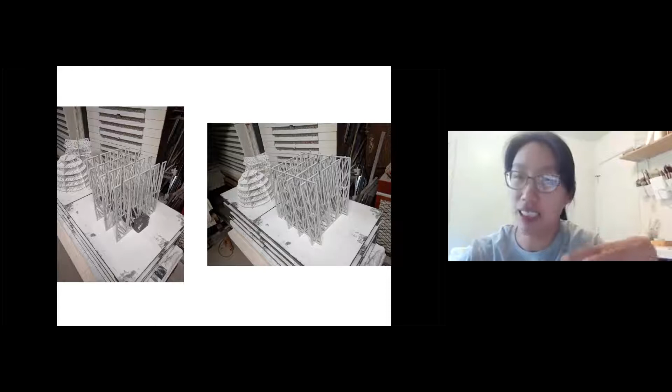So you can see that there's 2 other pieces that are also on that top bed. Also, they're just slotted together very gently. And then, when it's in the kiln and it gets fired, all the glaze is basically sticking everything together. So here is some of the final products of that firing. You can see there are these round rondelle forms, and then there are these more rectangular forms that are slotted in there that basically keep it together.

So it's pretty time intensive to make these forms. It can be somewhere from more than a month or a couple of months, depending on how many models or patterns I need to make. So for instance, this one is 2 patterns, right? There's a circle, and then there's a rectangular one. So that's actually not that many shapes.

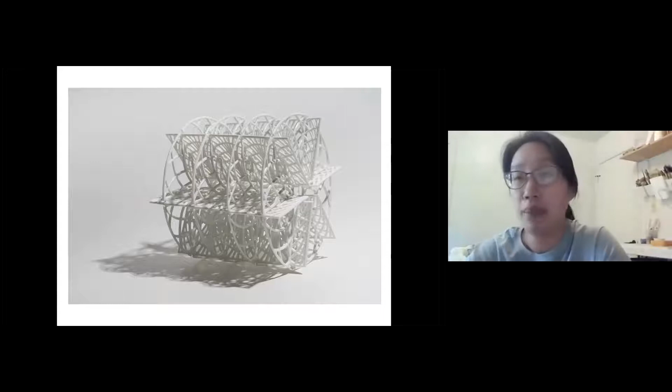If I have to make a form that has maybe 6 to 7, maybe even more than that, every single different shape needs to have a different mold. I can't just make one big mold and then cut it into different shapes. That doesn't work. So it's very particular in how aesthetically it looks. I have to design the pattern to fit that rectangular or that oval shape. So obviously that plays a big part as well.

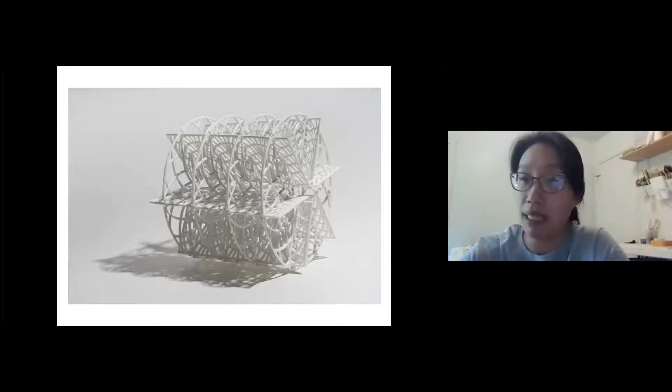So same thing with this bowl-like sculpture here, right? Each of those circles, they're all different molds. The side piece is one kind of shape as well. So, I was really interested in how light would be able to pass through these forms. And the idea of defying ceramics and defying gravity in some sort of way creates this element of wonder.

So this type of form is actually called slice forms, and if people are interested, they could look it up on the internet. Slice forms is a method where you can draw something 3-dimensional in CAD and put it into this program, and then it will slice it up, and you can create a slotted form from that. I believe it's most often used in furniture design, maybe architecture as well. But anyways, I was also interested because it's this 2D to 3D kind of method as well.

So this is just a breakdown of how I create things. You can see design: RhinoCAD, obviously I use that one the most, Illustrator, Fusion 360, and there might be 1 or 2 other programs, but RhinoCAD is definitely the most used program. Then prototype and testing, so cardboard or 3D printed models as well.

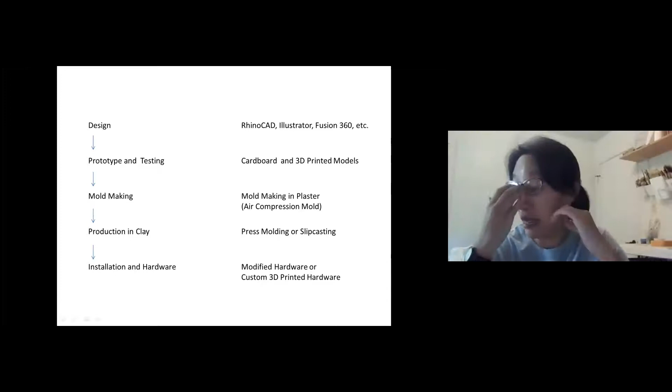For a current project that I'm doing, I physically make the plaster mold, and I go through the whole process, and that's not the final mold. And then I make a mold again. So usually in the prototype and testing method, because I'm working with molds, I can produce that module itself a couple times or more, and glaze fire everything really roughly to figure out what works.

And then after that, basically I'm going into production of many objects. So mold making, obviously mold making in plaster, I do an air compression mold. Production in clay, press molding or slip casting. So actually I have not been doing slip casting for quite a long time. The lattice forms that I'm making are actually all press molded and hand built.

More recently, I am combining slip casting with press molded lattices. But I'll talk about that maybe a little bit later on as well. Installation and hardware, modified hardware or custom 3D printed hardware. So the 3D printed hardware, maybe in the last 2 years-ish, I've been doing a lot more on that.

So it's always been very difficult for me to find specific hardware for my work, just because, you know, in terms of attaching it or hanging it and stuff like that. So before, I've bought hardware, I've modified it and it's like, okay. But the 3D printing has really allowed me to really customize the way that I can put things together. And that's pretty huge because I'm not limited to whatever is mass produced.

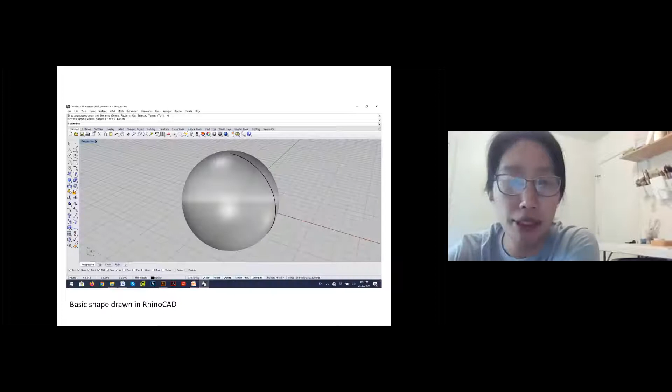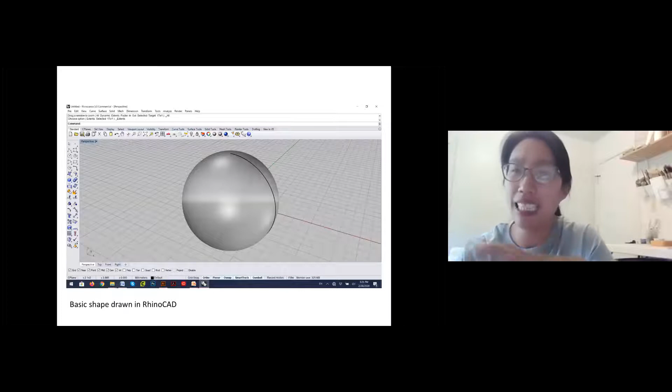Okay, so designing the template and the pattern, I'm going to use one of my slot sculptures just to give you an example. So this is just a basic shape drawn in RhinoCAD. So just a basic sort of circle. So generally, if you look at my forms, the whole big form is quite a simple shape. So it's usually like a box or a cube, a sphere, or kind of like a column, right? But then what it's actually made of, the actual form inside itself, is very complex.

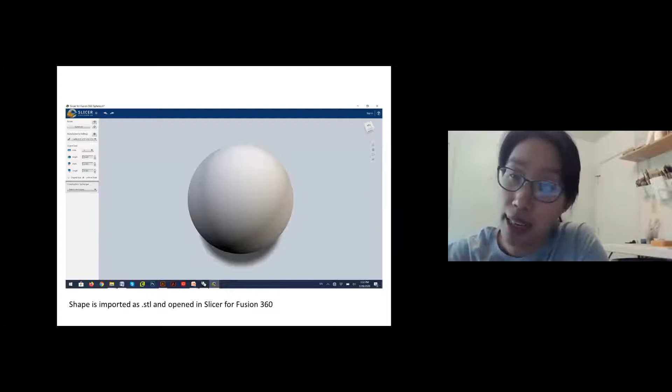So this is actually a slicer for Fusion 360. If anyone is interested in this program, I believe this might be actually part of the actual Fusion 360 software now. I think it might have just all been combined. But if you Google this, I think something will come up that you can somehow find the software. So anyways, it's really great because you can import your shape as an STL. And then you can slice it in many different ways.

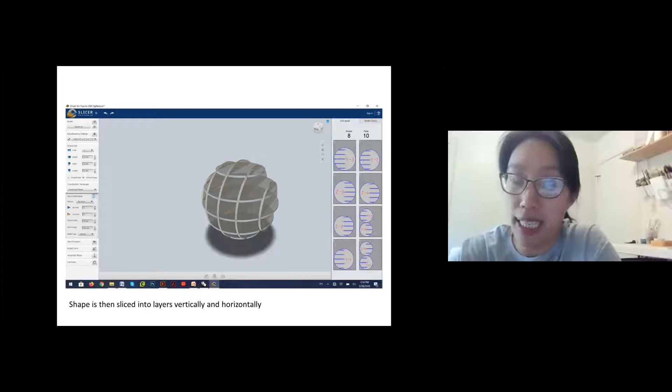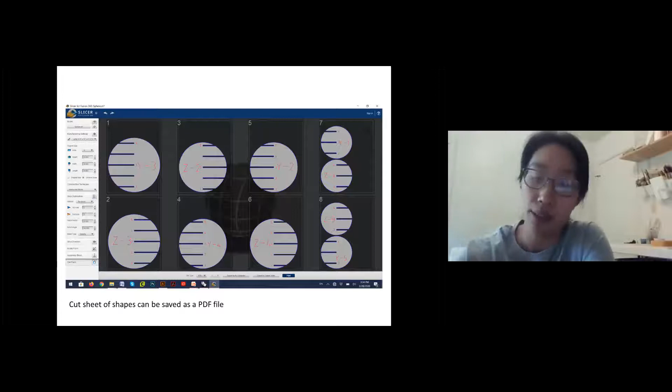So you can see here in the slicer program, how many slices you want in the X and then the Y axis as well. And then it will give you a pattern you can see on the right as a PDF. So I'm going to save this as a PDF. You can see here, it's all marked as well. And you can also set the thickness of your material and also the width of the slot as well. So I take these drawings and here you can see that it's imported into Illustrator and saved as an AI file.

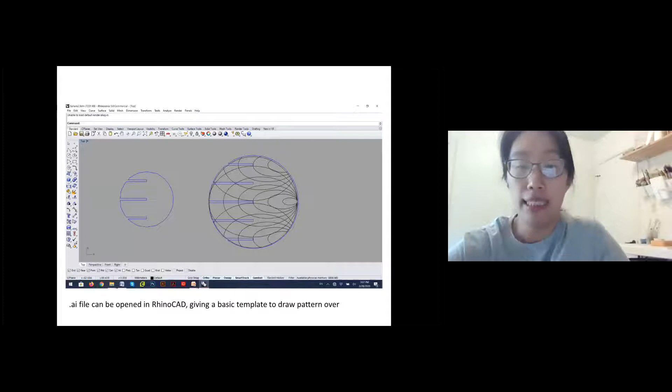So I take this AI file and then I open it up in Rhino. So you can see that the AI file is now opened in RhinoCAD. And then once I have this basic template, I can draw a pattern over it. So you can see this is actually the pattern for one of my pieces. I can just overlay it on top.

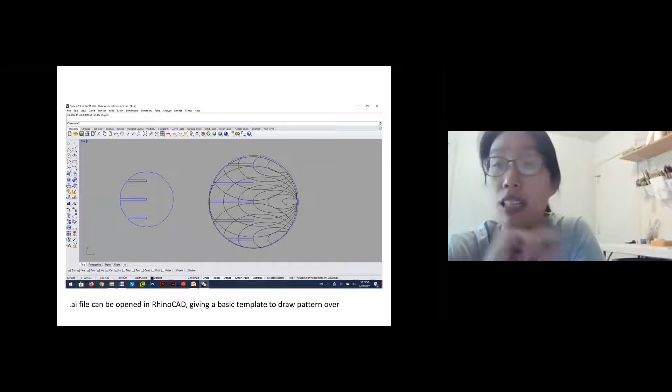And then I use a command called pipe to make basically a round tubing over everything. So just in terms of the lines where the blue lines and the black lines intersect, right? I can also trim them, because I do want that slot right there to fit the other tile into it. So you can see here, the 3D model is drawn over the lines. The slots are double checked to make sure that they're a little wider than the material for tolerance.

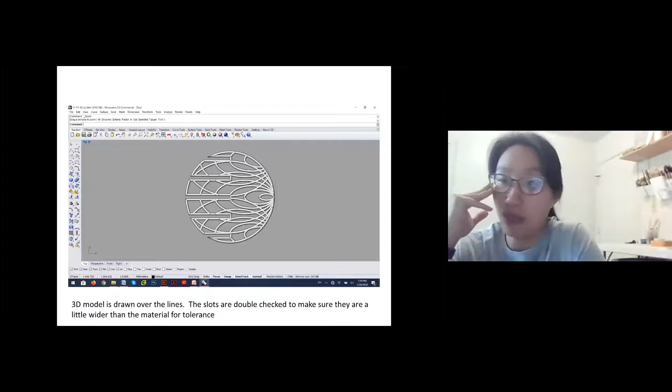So working with a lot of modules and things that fit together, I've really learned that you need tolerance more than you think you would need. It's not like a piece of wood or a piece of paper where it's flexible. And obviously it's very difficult to grind a little bit off. So if it's 1 centimeter, then you need to make that slot like 1.2, 1.3 or something like that to really give a generous width.

So another thing is when you're slotting all of these objects together, each of them do have a bit of deformity. So if one is kind of deformed, and then you're putting in that last piece, the slot may be too small because everything is kind of offset as well.

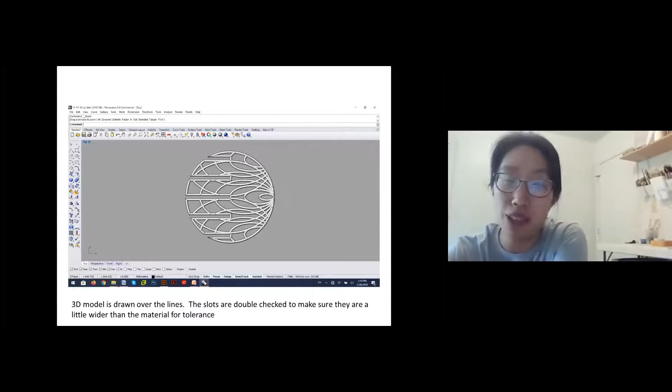So it's a very tricky balance in terms of putting all of these together and also supporting them as well, because this is a round object. So you have to be really careful in how you're putting it together, because it's not like a cube where everything can sit on the table.

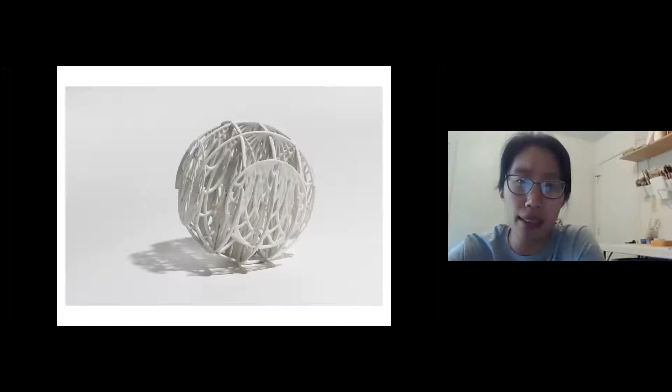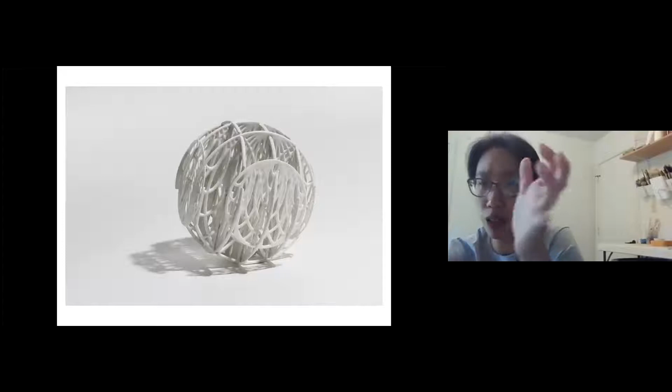So here's the final piece here. You can see it's slotted together. I think there's maybe 4 different sort of shapes that are part of this as well. So I think when I supported this, I just used bricks and kind of wadding to put it together. But you can also make another actual clay form to kind of hold it in place as well.

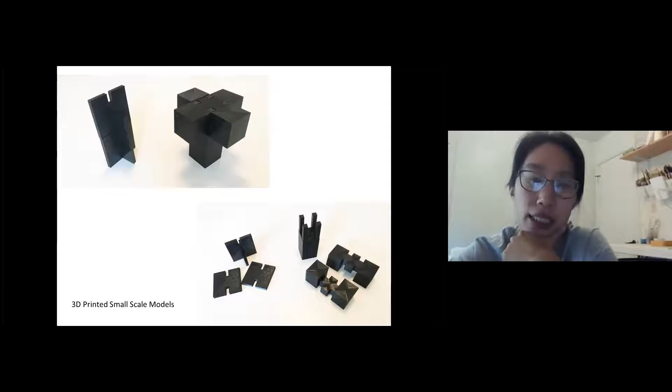Okay, so 3D printed small scale models you can see here. So more testing of how things would go together. I was interested in making this form with tiles that were almost like H-shaped, that you could stack on top of each other. The one on the bottom right here was another idea of making this shape on the top middle here, this kind of cross shape.

So I was interested in Japanese joinery. I still am kind of, and how things can basically fit together without screws or nails. It's the shape itself that holds it together.

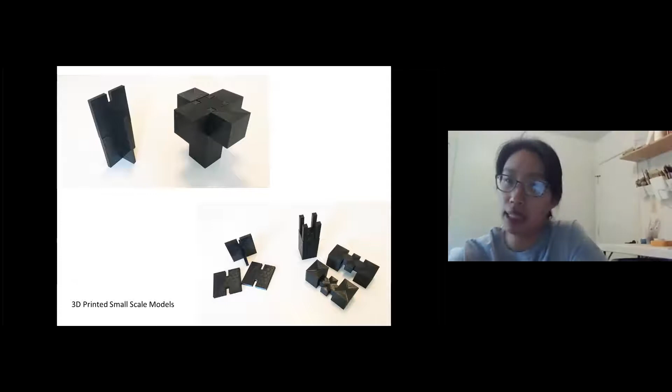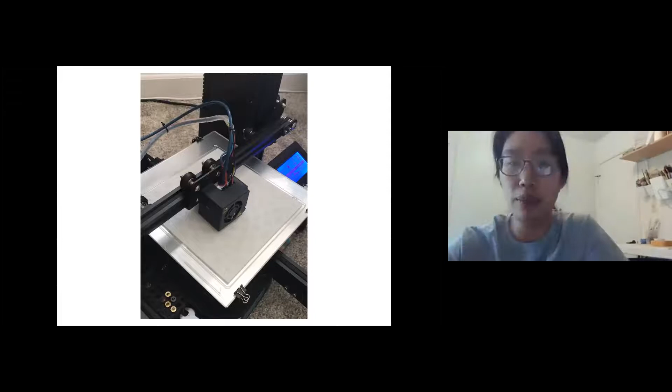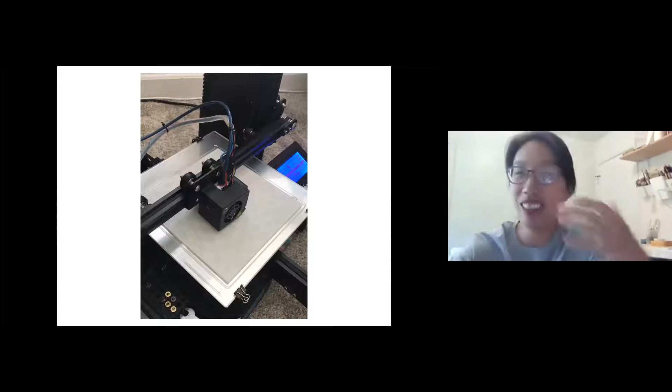Okay, so this is the FDM printer or filament printer, if people are not familiar with that. This is, I think, my husband's. It was his original small one here. So you can see that it's building up layers. It's almost like this toothpaste tube that's squeezing out plastic back and forth over and over to basically create this sort of pattern plate you can see right there. So yeah.

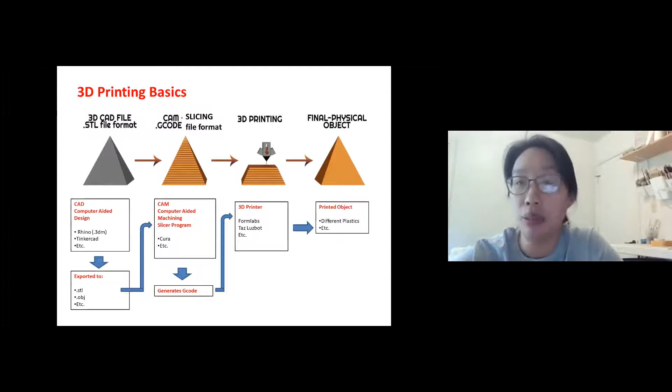Okay, so 3D printing basics. This is a slide that I like to show my students when I'm talking about 3D printing. I'm just going to really summarize here. But basically, you have a CAD file. You're drawing your shape, and then you save it as STL format. And then the second one here is a slicing program that slices it up into layers and also writes the G-code. So then it gets put onto an SD card or memory card, which actually gets inserted into the machine. The machine prints your work, and there's a final object that comes out from that.

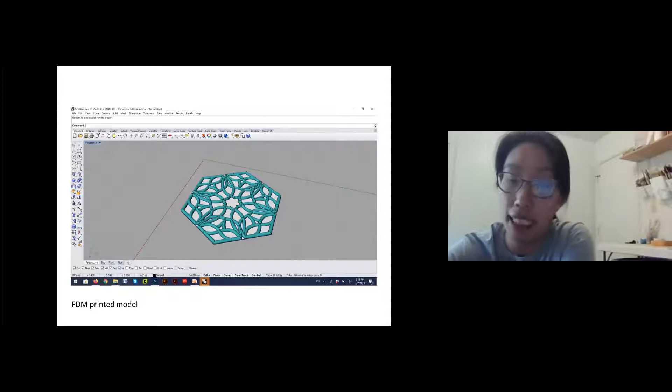Okay, so this is a file for an FDM model, actually the one that was on the printer previously. So you can see that there's the pattern, which is then piped and actually has some sort of backing to it to make it easier to pull out from the mold. So you can see the printed object here, right? I've printed in many different ways, without that backing, but with that backing, it's a little easier for me to cast it, because the plaster won't actually go underneath the little seam, and I get a little bit of a cleaner line as well.

SLA printing model. So this was out of a resin printer when I was living in China as well. So that's another way of printing. It does give a really smooth surface. I don't have access to a resin printer that is really large. That's the thing with that type of printing. But it does give a really nice smooth surface that filament printing doesn't necessarily give you.

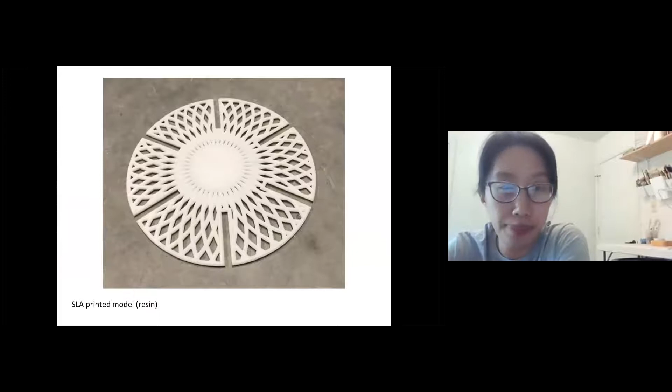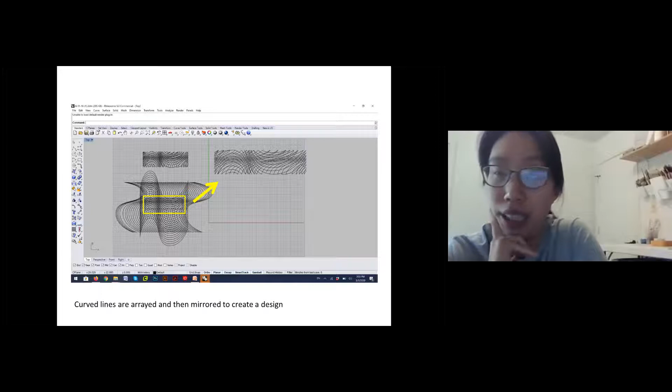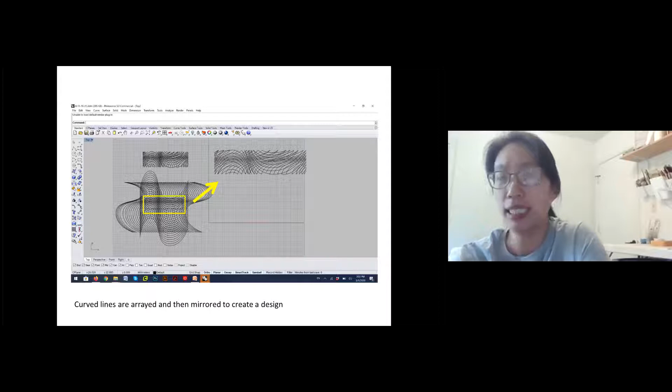So the thing with these lattice forms is that the more crossed they are, the stronger it is. So you don't want a line that is basically by itself, not attached to anything and unsupported. That's not good because obviously it could break at that point. So the more mesh, quote unquote, that it is, or the more connected and the more crossed it is, actually the stronger that particular piece is.

Okay, so actually before, I would say maybe about 3 years ago or more, maybe 4 years ago, I wasn't actually doing a lot of 3D printing. I was actually using the CNC in a very basic way. So I would just make basically a vector line. That's what you saw in the CAD file there. So it's just a line. And then the drill bit that was on the CNC would give me a thickness.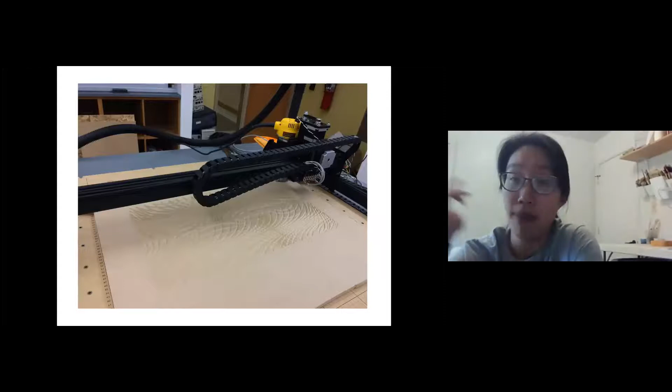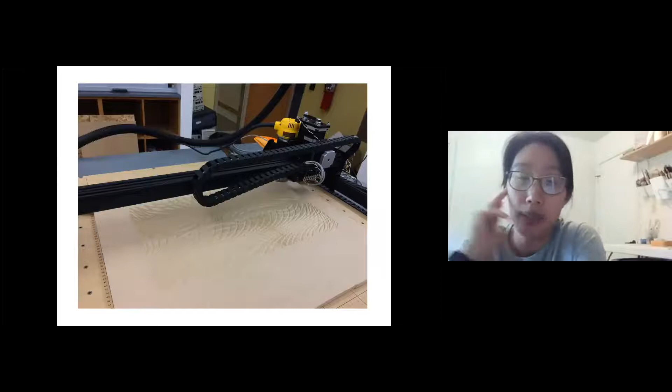So the CNC, there was a V bit, a bit that's like this, obviously. So it runs along the wood, and so it creates that V groove there. And so it was basically just flipping the vector drawing the other way to get the back and the front. And then I'd make some registration dots on how it would land. So this was not a very accurate way of making these forms, just because if the bed wasn't level, that's a problem, or something was not completely aligned.

CNC engraved MDF model. So this one was done in China. And the quality was quite good, but it takes a very long time to do something like this. So this is about 10 inches square-ish, and I think it took about 2 days on the CNC bed.

So with the CNC, you start with a big rough bit, obviously, then you go to a smaller bit and maybe a smaller bit after that. So there's so many steps actually to get something like this off the CNC in comparison to the 3D printer, where you can get something like this and not have to wait several days necessarily.

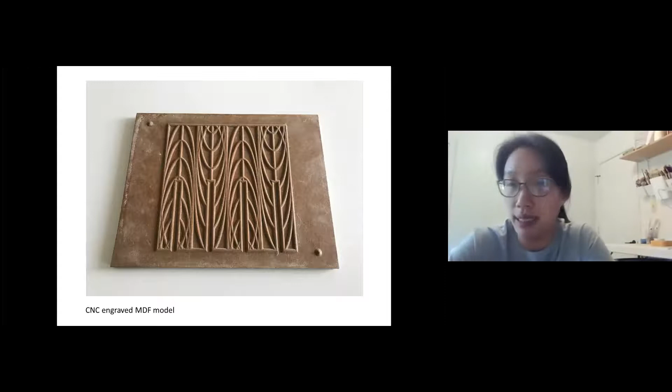So another way of making the model is out of foam. So for this, actually, I just carved the negative shape into foam and cast plaster on top of that to get the form. Okay, so you can see here, actually, there are 4 dots that are on the corners of this piece of plaster.

So actually, I would drill holes there and then also use a dowel to register, because it's a 2-piece mold actually, so register the top and the bottom. So there's a lot of kind of issues and problematic things with that. Registration is something that I've really dealt with a lot when dealing with these forms, but I will talk about that a little bit later on.

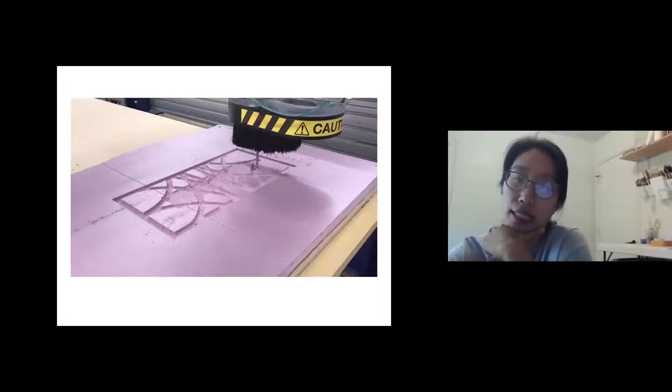So you can see obviously the CNC is drilling into the foam. Here it's quite a rough cut. So this is actually one of the pieces that is in the show. There was obviously a pattern plate that was made. I made these slabs. And then you can hand build with them just like you hand build with regular slabs. So, slip and score, put the slip on, and then join it together.

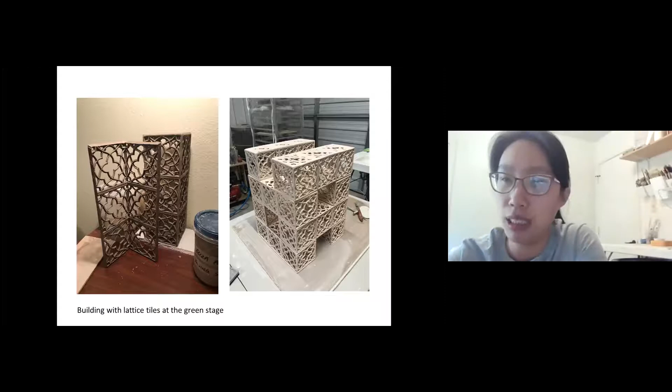I am not particularly a great hand builder, but this was a way of getting a volumetric form, relatively large, in some sort of way that was not tiles slotted together. It's an actual volume, right? Whereas the work before was tiles, flat forms that were slotted together. So it does have a very different feel in terms of how you look at it and how it's received as well.

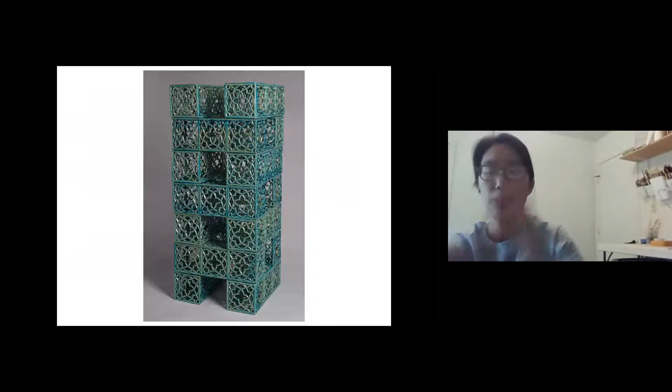So this is the piece that is in the show. I forget how many modules there are. I think there are maybe 14 here, 2 layers that alternate, stacked to create a column as well. So this is really early on when I was here in Texas, maybe about 2.5 years ago now, that I started building these kind of volumetric forms.

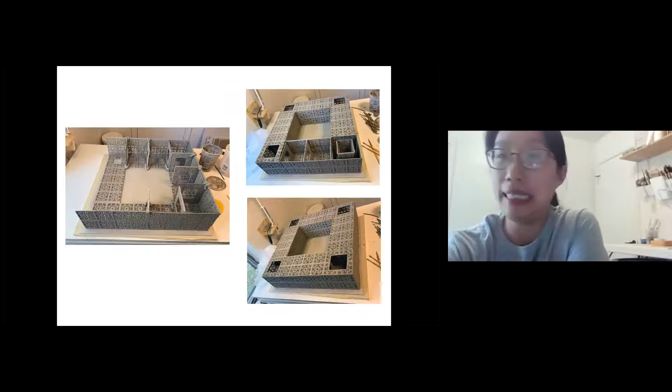Okay, so this is a piece that is also in the show, the big cube, which was really a huge technical challenge to make. I was interested in making a larger lattice form that you could slot together as well. So this was a whole summer basically of trying to figure this thing out. And you can see that there are so many different shapes as well. So I actually built this twice. One time, this top square piece was actually 4 pieces, and that didn't work. So then I went to build it as one.

But anyways, it's built of many different lattice tiles here. You can see on the left here that they're supported by clay to put it into that position. And it's really tricky because basically all of these slabs need to be about the same wetness when you put it together. And it also has to be put together pretty fast. So I have to basically join everything together maybe in one day. The finishing can come a bit later, but you have to put it together pretty fast, and especially if it's summertime, it's a little bit hot. That's also problematic as well.

But anyways, these large holes here, actually on the top right one, you can see that there is this cone-shaped square, faceted shape where that pillar slots into as well. So inside of here, you can see that there are braces to keep that wall up as well. Otherwise it would warp.

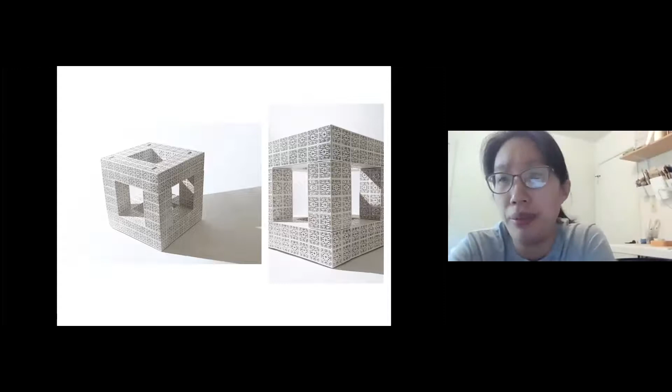Okay, so here's the piece. You can see that there are 2 large square pieces on the top and the bottom. And then the middle ones are actually 4 columns that slot together as well. So, making all the slabs takes time, and also joining it together. But the real work is actually cleaning all the holes, which is still most of the work. So all the finishing work actually does take a really long time to do.

I have had a couple methods of dealing with that. Obviously, you need to make the mold as well as you can, so you don't have to do a lot of cleanup. Another thing that I have been doing for another piece is firing to 022. So that is really soft bisque. And then taking a file, sometimes a Dremel, and then grinding that as well. So cleaning at the green stage, obviously it's best when it's done when it's leather hard, but it's a bit fragile.

But if it is bisqued to a very low temperature, you are not constricted by kind of wetness or the dryness of the piece.

So, okay, installation and hardware. So I mentioned before that 3D printing hardware is something that's becoming more prominent in my work, and it's also quite important as well. So when I'm dealing with a lot of objects or a lot of modules, I do want the easiest way to install it or adjust it if it's on the wall or if it's hanging. Obviously, if you need to unscrew or screw back a piece of hardware in the wall and you have 500 of them, you would like that to be as convenient as possible.

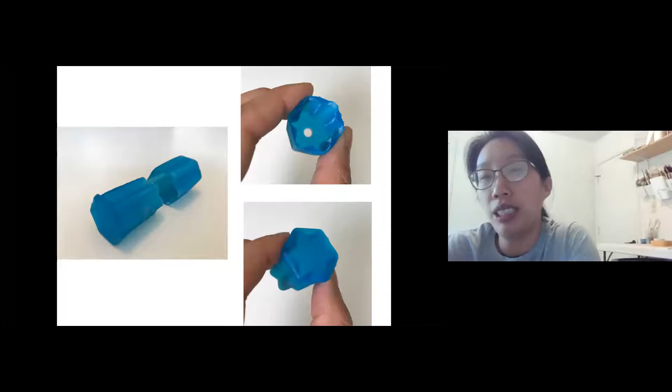So this is one thing that we were experimenting with. I think last year I had made a tile piece. So this was actually my husband's idea to make this piece of hardware. So it actually is like a lipstick case. It's resin printed, and you can see on one side that there's a hole there. So actually you can screw the one in the top right-hand corner into the wall, and then you can put the tile in, and then the lipstick case part goes on top of it.

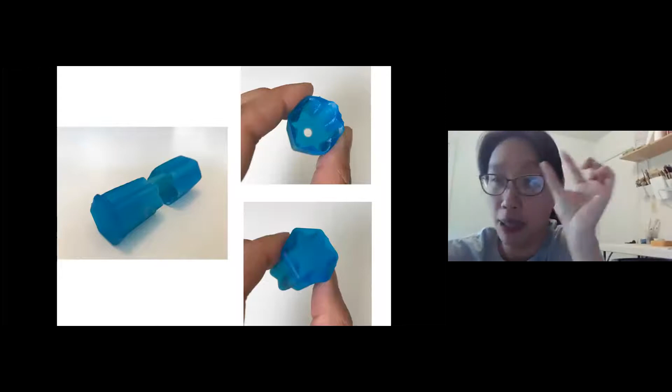So you can see right here how this back part, if you look at the left image, is screwed into the crate. I was just using that as a temporary thing, and then the top part, like the lipstick case, is basically pushed into the center there. So it's allowing for the tile to have a little bit of a gap or not be flat against the wall, and it has a little bit of lift, and obviously it's part of the design as well.

3D printed hardware. This is for that H piece. I don't know if I have that picture of that piece here. Anyways, so these were printed hardware for the tiles basically to sit onto the floor. You can also print pins. The little holes in this hardware as well are where to put museum wax, so you could stick it basically onto the floor as well.

Oh, okay, I do have a picture here. So this is the H piece that I was working on here. So you can see that there's these little, I wouldn't say clips, but little types of hardware that you push into that groove there. So that tile is basically held in place. And then there's pins that are on those corners as well.

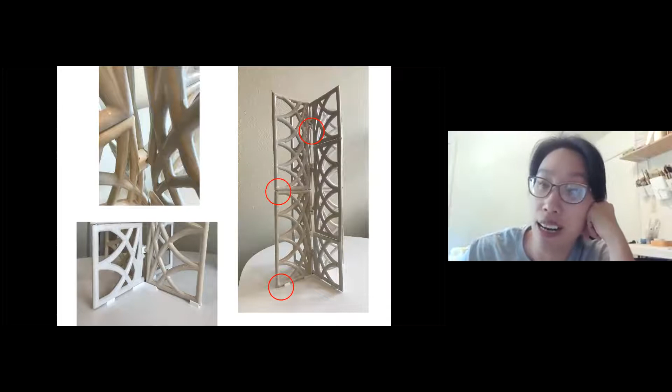So I wouldn't say this is an extremely successful way of putting things together, but it was a good stepping stone in terms of learning how to use hardware to put together objects to make an architectural installation. So this is just a little bit of a close-up of this.

So in previous installations or connecting modules, this is the way that I had done it. So, the ceramic has a hole in it. It is oversized, and in connecting two pieces I use something like a pin, or you can use a nail or some other type of hardware object. Use beeswax basically, wrap it, and then stick it between the two pieces of ceramic.

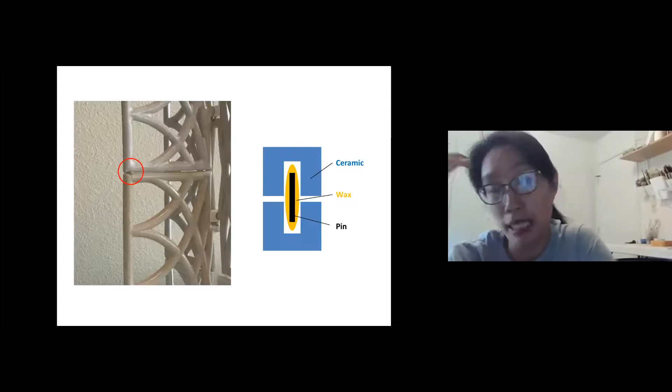So, as you might know, ceramic holes never line up perfectly. You can never make something to fit perfectly into another thing. So that's always something that you need to plan for. So the pin would give some sort of stability to the joint. And then the wax actually is soft enough that, if it's not completely lined up, it's still okay.

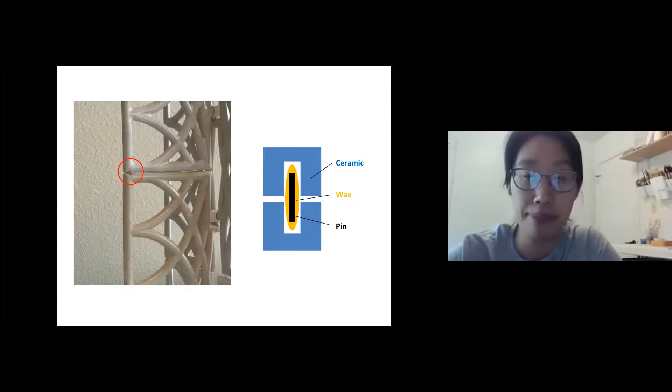Okay, so I have a mold making video here. And I think I can do a new share. Zoom is great. Okay, so I hope you can see this video here, and then I will play it for you.

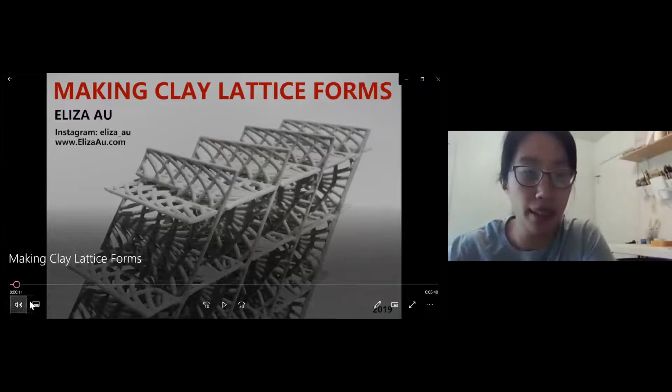So I think I just do an introduction on some of my work, and then you'll get to see the process of me pouring the mold, making the mold, and also doing a press for basically a one-piece mold. So later on in this talk, I have a two-piece mold that I'm going to press for you. Okay, I'm going to play the video.

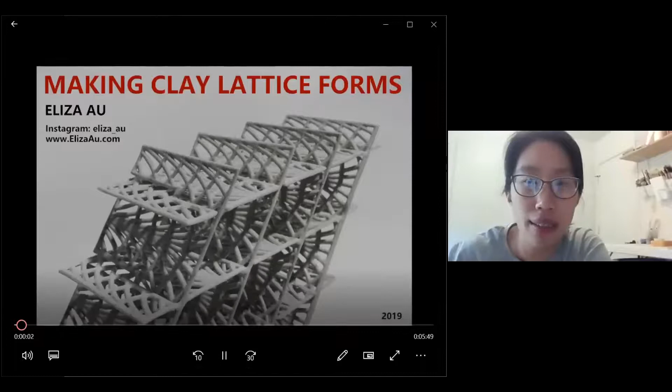Let me stop share for a second. Maybe it's something with my video settings. No. There should be little check boxes when you hit share screen. Okay, let me try again here. Oh, I see it. Share sound. Sorry about that. Yes, thank you. And then it says optimize for video clip, but I'm not sure if I need to do that. Okay, share. It'll help. Okay, let's try that again. I think it should be okay now.

Hi, everybody. My name is Eliza Au, and I'm a ceramic artist who works with clay lattices. This is an example of one of my pieces. It is made out of layers of tiles, which are first high-fired and then slotted together, glazed, and then low-fired. The process of this piece started with something like this model, which was 3D printed. This shape, I will make a plaster mold of and make these individually out of clay. So let's get started.

I think I can pause and just talk a little bit over the video because most of this video doesn't have any sound. These are all the types of tools that I use, which are pretty common. You've got your bucket, your rolling pin and such. There's only one piece of equipment that is a little more specialized, which is a mold duct tubing, circled right here. It's from Axner Pottery Supply, and it's usually used for the ram press and the air compressor. It's not pictured there.

You can see that there's a 3D printed model. And then there's a wire mesh screen, which is made out of something called hardware cloth. It might be called chicken wire, but it's called hardware cloth, and this is about 1 centimeter squared. You can see the wire mesh is bigger than the 3D printed piece. I'm just going to go back one bit. There is about 1.5 centimeters of spacing between your model and the top of the wire mesh. That's really important. All the measurements shown in this video need to be quite accurate. Otherwise, you may have some issues later on.

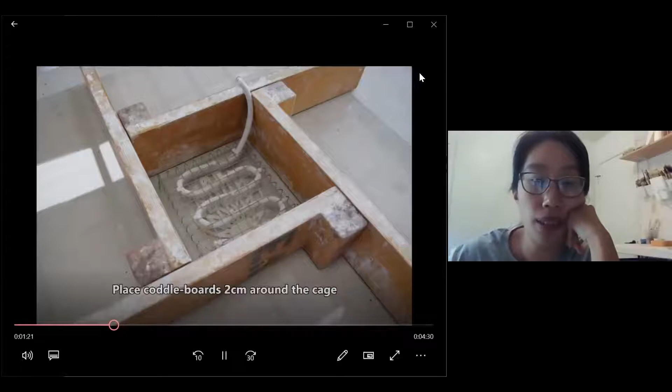Place coddle boards around the cage, so it's not touching the cage. There is a little bit of space between there. You can see it's marked at 4 centimeters. Make sure that the tubing is exiting the mold there. This is actually going to be sticking out of the plaster. That's where you're going to blow the air into.

You can see that you're preparing the plaster here and mixing it. Just a note, I don't go into detail on mixing plaster here, but the plaster and water ratio is 100 parts plaster to 60 parts water. For a usual slip casting mold, that's 100 parts plaster to 70 parts water. So it is a little bit more dense. I'll just keep on going here.

I'm just using my hand to keep the net from floating, and I'm pouring the plaster in. Then the plaster is basically enveloping the mesh inside it. At some point, I'll take my hand out and usually I just shake the table slightly. You can see that the plaster is set and the piece of tubing is sticking out. So I just cut off that little piece of excess right there.

I removed the plaster from the coddle boards here, cleaning up the mold as well. Any kind of edge, and then just using a knife or a tool to take the model out of the plaster.

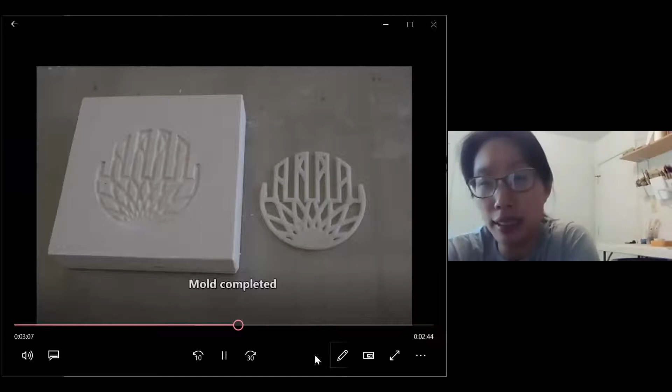Yeah, you can see this one doesn't have any backing for the model. Yep, clean up all the edges, kind of removing any of the undercuts because that might grab a little bit. So you don't necessarily need to use a 3D printed model. Technically, you could just make it out of clay or anything else. That is obviously okay for a one-piece mold.

So, okay, pressing the mold with clay. You can see I'm preparing the clay here. I'm rolling like a small slab. And then I'm going to pound the clay into the slab. And I'm just gonna take a rib and take off the excess clay. So you can see in this mold, actually, there are no registration marks. So it's gonna be actually flat on one side.

Scraping off all the excess clay. So you can see now that all the holes are basically perforations. They are cleaned out. Yeah, so you can see that there's the clay inside of the crevices now.

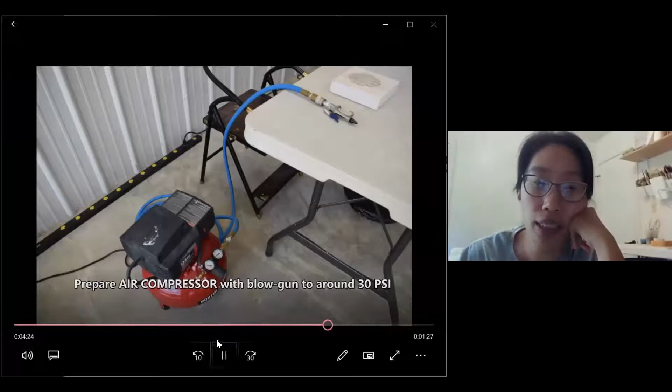Okay, so releasing the mold. I use an air compressor with a blowgun to around 30 PSI. So you really want to make sure that, generally, I never go over that. I have blown up quite a few molds before, because if the air compression is too strong, obviously it will break your mold, or if your mold is really wet. If it's really, really wet, it is quite soft, so it won't take the pressure very well.

Yeah, so you can see actually here there's a piece of cloth, and I've used these as spacers in order to turn this mold over to drop it. The piece of cloth is actually pretty important. You can't drop it on just a piece of wood, because it's going to grab to the wood and it's going to shrink and it's going to crack. So I found that using a piece of cloth that is fairly flexible, like a bed sheet kind of fabric, is really good.

The more stretchy it is, the better it works, because when the clay actually hardens, you can pull or stretch the fabric a bit, and it will release the clay from the fabric.

So I'm turning the mold upside down onto the spacers. You always need a little bit of space between the actual mold and the surface of your board. So that's important, right? Because if you put the mold directly on the board, it won't release itself. It will still stick. So it does need that little bit of space to actually drop down.

So you can place the blow gun on the opening, and then you can see that it's starting to expel all the bubbles from the water from the mold. So it's really those bubbles that are actually pushing that piece of clay down onto the surface of the board. So for something that is really fine or lattice-like, you do really need to release it pretty much immediately, because obviously when clay is in a mold and it shrinks, it will crack. So just getting the water off of that.

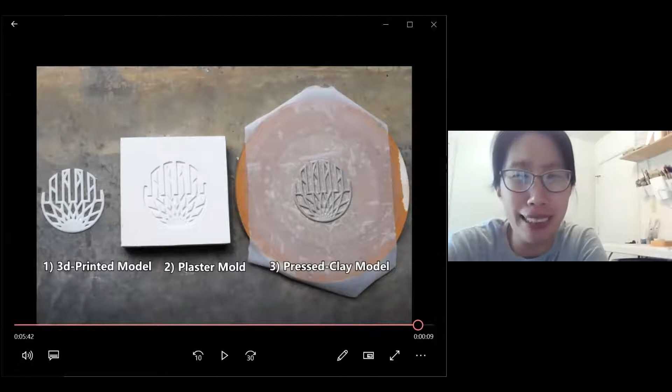I've had students before try to make volumetric things, but they don't really work too well, because when it releases from the mold, it is extremely wet. So in terms of making 3-dimensional things, it's better to just release it as a slab. And then, if you want, you can drape it over a mold in some sort of way. Great.

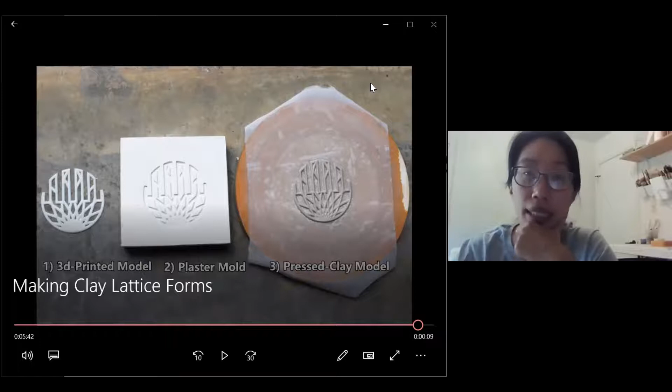Okay, so I'm going to stop share here. And let's see here. Actually, I'm going to switch to my other screen right now, Matt. Okay, and we'll see how that goes. Just give me a moment. Sounds good. Oh, can you hear me now? Yeah, oh, you're muted, Matt. Yeah, we can hear you perfectly well. I guess if anybody is having trouble seeing Eliza, you can pin this video. Maybe the audio is coming from this video stream. Okay. For some reason, the phone volume, I guess it doesn't matter too much as long as you can hear me. Yeah. But my volume is up all the way. Yeah, you're a bit faint, but that's fine, I think. Okay. Just as long as you can hear me. Okay.

So I'm just going to talk about a couple of things. So you can see here, actually, sorry, I'm just going to come up closer to the camera here, and hopefully, can you guys see this? Yeah. Okay, so this is something that I'm working on in terms of making a hanging piece.